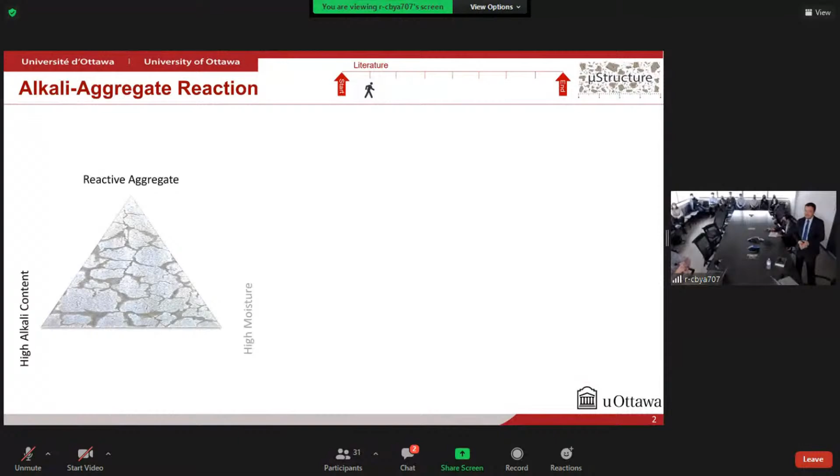So what is AAR? AAR is one of the most harmful distress mechanisms affecting the durability of concrete worldwide. Its development can cause internal cracking, affecting the mechanical properties of the concrete and decreasing its lifespan. AAR can be divided into two main reaction types: alkali carbonate reaction and alkali silica reaction, which is the most common and the one I will be exploring more during this presentation.

For the occurrence of ASR, three elements are simultaneously necessary: the presence of reactive aggregates, high moisture condition, and high alkali content. Without one of these three elements, the development of the reaction is not possible. And once it starts in the field, there's no universal solution that could be applied in different scenarios to mitigate the reaction. So the thing here is that we should act to prevent the reaction from happening.

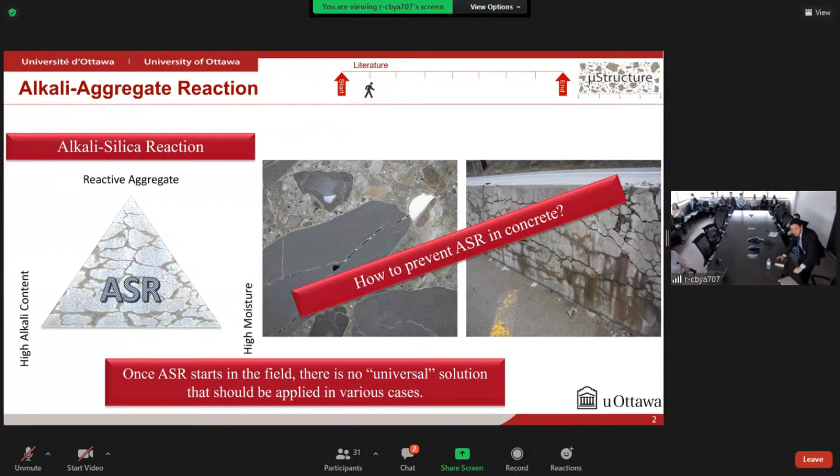So what can we do to prevent the development of ASR in the field? One of the ways is through the use of chemical admixtures, for example lithium nitrate, which can change the dissolution and solubility of reactive silica, forming a protective barrier surrounding the aggregates and changing the chemical composition of the ASR gel. The problem is that these products are too expensive and their effectiveness is constantly questioned in the literature.

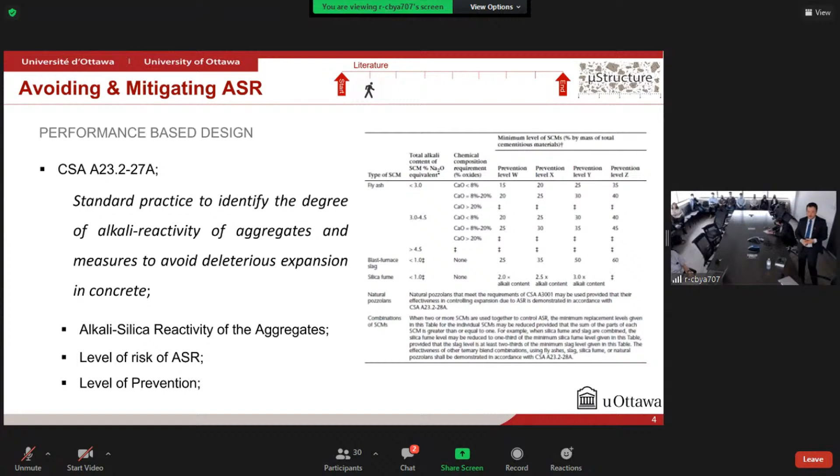Another way is through the use of supplementary cementing materials, which are byproducts from different industries, and these materials can be used in combination with cement to enhance the hardened properties of the concrete. For example, here in Canada we have performance-based design standards that give engineers good practice to identify the degree of alkali reactivity of aggregates and measures to avoid deleterious expansion in concrete. For that, it's necessary to know the reactivity of the aggregates and the level of risk of ASR development. With that information, we can then select the best level of prevention, which is basically this table here that gives us minimum amounts of cement replacement by the most common types of SCMs used in Canada.

However, new evidence in the literature indicates that SCMs only delay the occurrence of ASR in concrete. So we ask ourselves: do SCMs avoid or only delay and mitigate ASR-induced expansion in concrete? And if SCMs only delay the process, is it possible to find other products that would act as a backup to mitigate the ASR development?

Going through the literature with those questions in mind, we found that among the different alternatives, self-healing technology might be the best option, because this type of material can enhance the self-healing of the concrete and change the damage within the concrete.

So what is self-healing of concrete? It can be divided into the natural healing process, which can be caused by calcium carbonate formation and continuous hydration of the unhydrated binder grains. It's important to mention that SCMs can enhance this behavior. Also, it can be caused by cement matrix swelling and sedimentation of solids within the cracks. The overall healing ability of the concrete can be enhanced by the use of artificial healing agents, such as microencapsulated bacteria and crystalline admixtures.

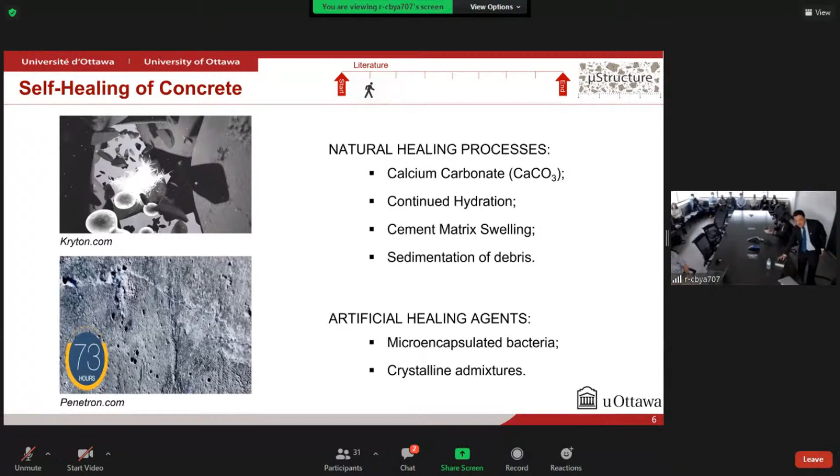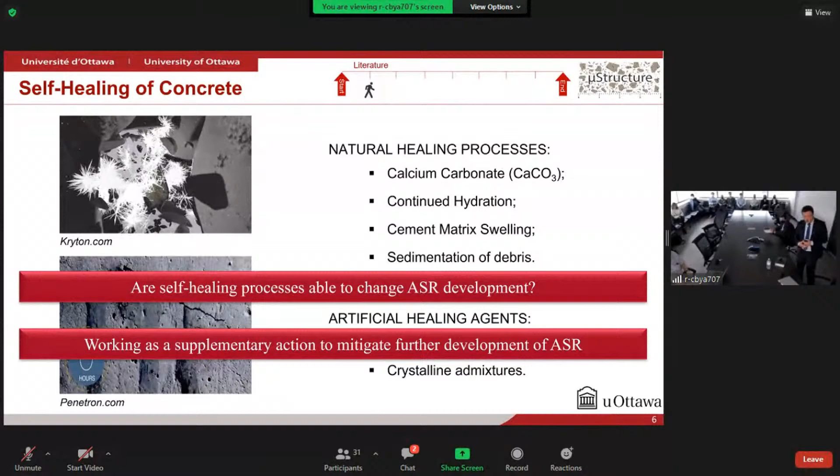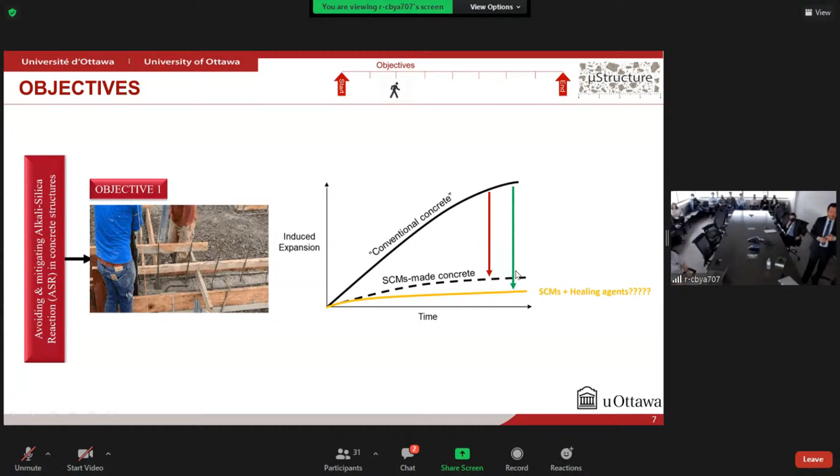So we ask ourselves: are self-healing processes able to change ASR development? And if we use artificial healing processes, can these materials work as a supplementary action to mitigate further development of ASR in concrete? With those questions in mind, we developed the structure of this research, in which first we would like to combine this self-healing technology with SCMs to mitigate the further development of ASR in concrete. However, we would like not only to use these materials for new concrete, but also to use them in aging concrete materials.

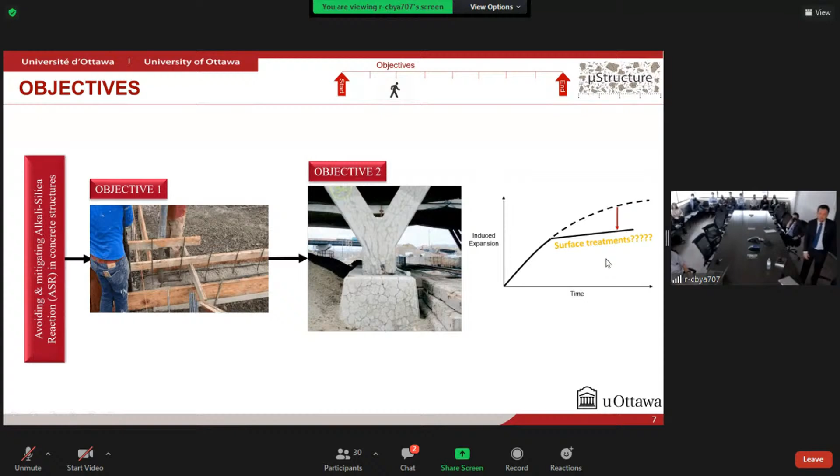For example, if we already have the development of ASR, can we use this technology to further mitigate the reaction? At the end of this research, we would like to propose a framework for an optimized selection of raw materials to prevent ASR in concrete.

In other words, we would like to go from a descriptive selection of raw materials to a performance-based selection of materials. Also, we developed two parallel research lines: first to understand autogenous and autonomous self-healing of concrete, and then the influence of high volume of SCMs on ASR distress development.

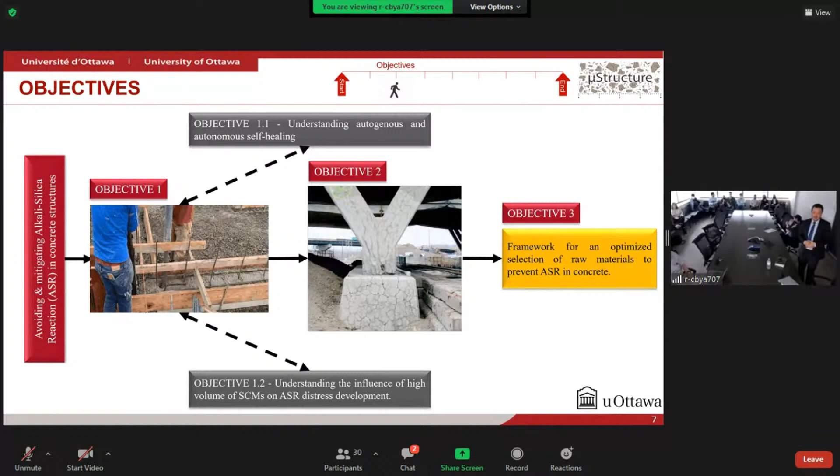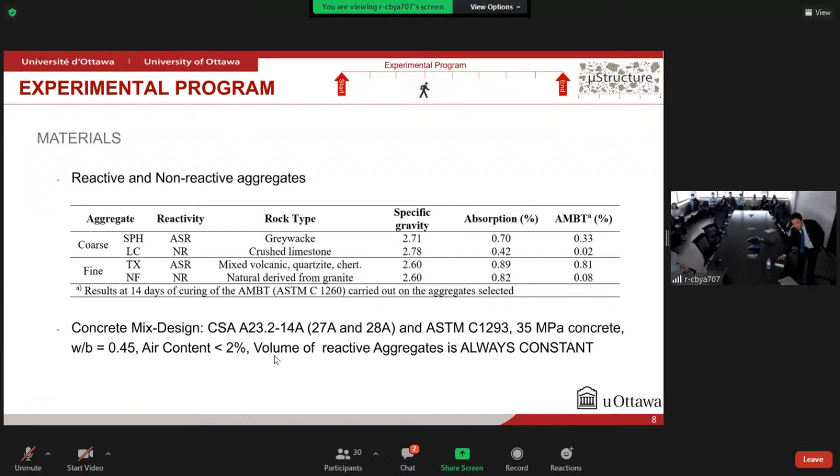We used two different reactive aggregates, a greywacke reactive coarse and a natural fine reactive aggregate. The overall concrete mix designs are based on the most used standards in North America, and it's important to mention that the volume of reactive aggregate is always constant for all mixtures.

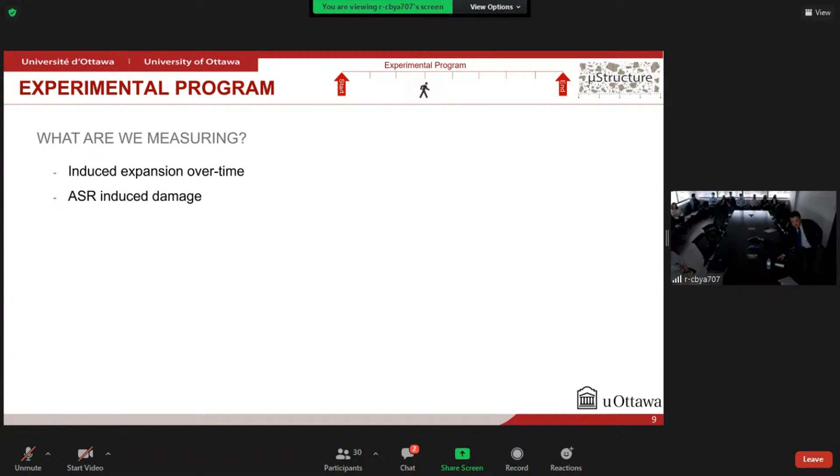So what were we measuring here? First, we measured the induced expansion over time of the concrete specimens, but also the induced damage due to ASR. Damage is defined as the mechanical properties reduction, which we measure through compressive and shear strength.

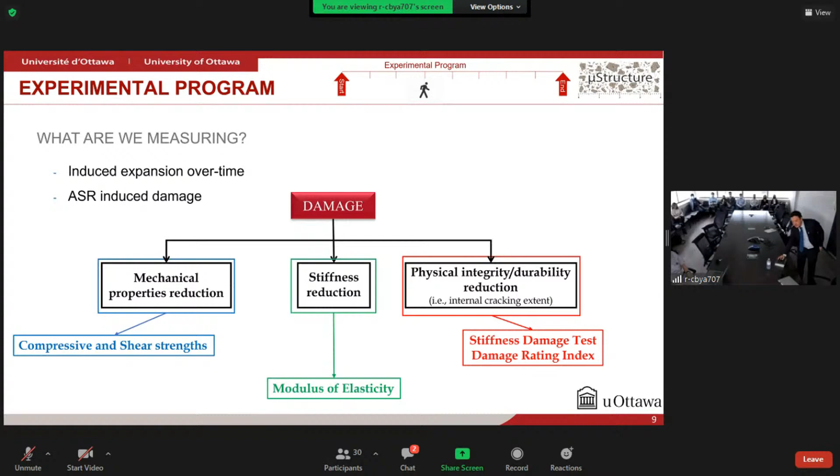Also, the stiffness reduction, which is assessed by the modulus of elasticity, and the physical integrity and durability reductions, with the internal cracking extent of the concrete through the techniques of stiffness damage test and damage rating index, which I will explain next.

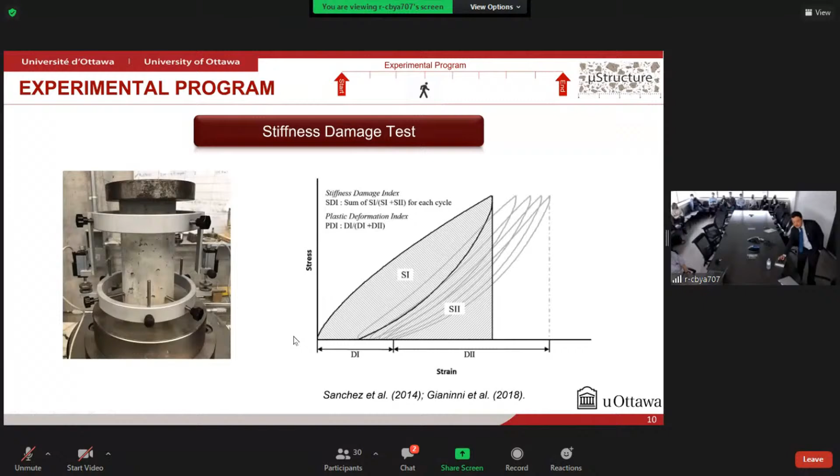SDT is a great tool in which we can quantify the distress degree in concrete. Besides the modulus of elasticity as an outcome, it also gives the stiffness damage index, which is the ratio of the dissipated energy to the total energy applied to the system, and the plastic deformation index, which is the plastic deformation relative to the total deformation implemented into the system.

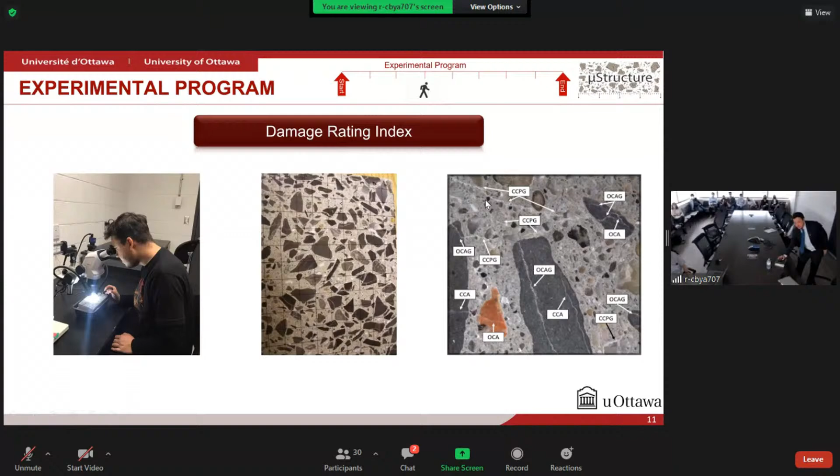As a microscopic evaluation, we use the damage rating index, in which we count the total amount and different types of cracks per centimeter square of a polished surface of concrete. With this technique, we can determine the extent of damage in concrete. For example, different features for cracks each have a weighting factor to give different importance, based on the development of damage in concrete.

So in the first objective of this research, we cast different concrete cylinders with two different reactive aggregates, different binder materials, and different chemical admixtures. The chemical admixtures here are the self-healing agents. After casting, we subjected the specimens to the development of ASR, and over time measured them mechanically and microscopically.

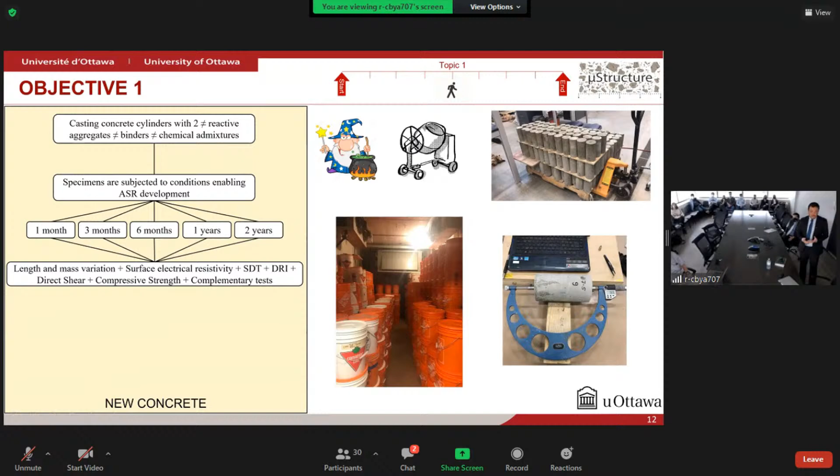So here's a general overview of the concrete mixtures we used. Once again, we followed the mix design based on CSA A23.2-27A. We used 4 different types of SCMs: slag, fly ash, silica fume, and metakaolin, and their amounts are based on the table from CSA.

However, instead of using the higher amount to avoid the development of ASR in concrete between the 2 years of evaluation, we used a little bit less to have a delay in the development of ASR. We are still looking to have some development, because we would like to then combine the different SCMs with crystalline admixtures to see how they would behave together. We used 4 different types of crystalline admixtures.

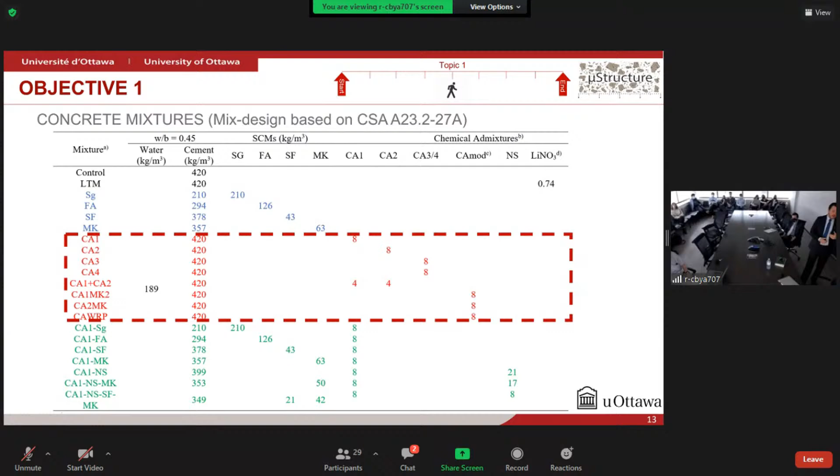We also mixed them differently to try to enhance their healing behavior, and at the end, as I mentioned, we combined crystalline admixtures with SCMs. The results show that all mixtures we produced in the lab were able to first mitigate and change ASR kinetics, decelerating the reaction rate, but also decreasing the final expansion after 2 years of evaluation.

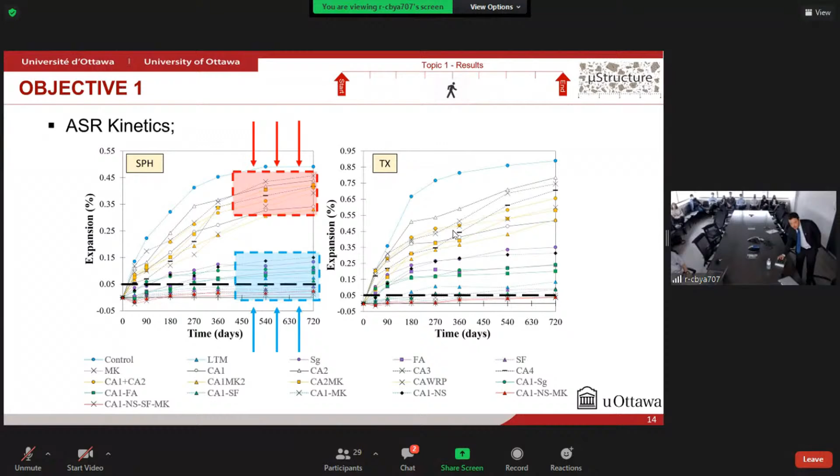As we can see here, for both aggregates, the overall results can be split into 2 main groups. In the first one, at the top, are the concrete specimens where we only added the different crystalline admixtures. In the bottom, we have both SCM-made concrete and SCM-made concrete with crystalline admixtures. All concrete mixtures were able to change ASR kinetics and expansion development.

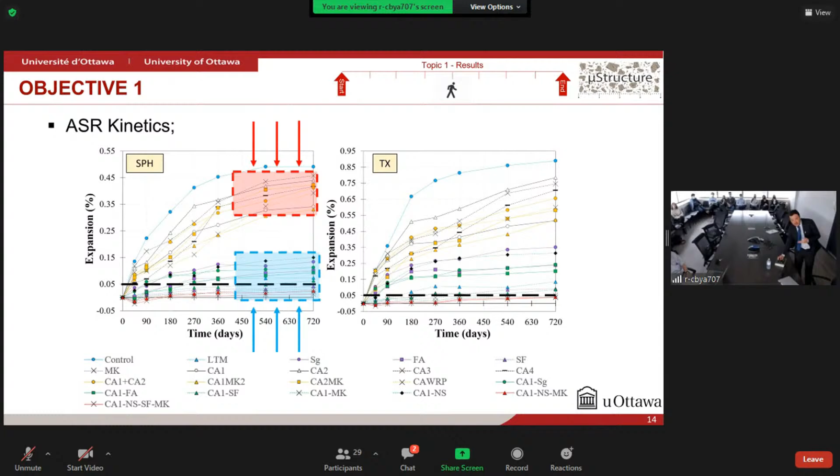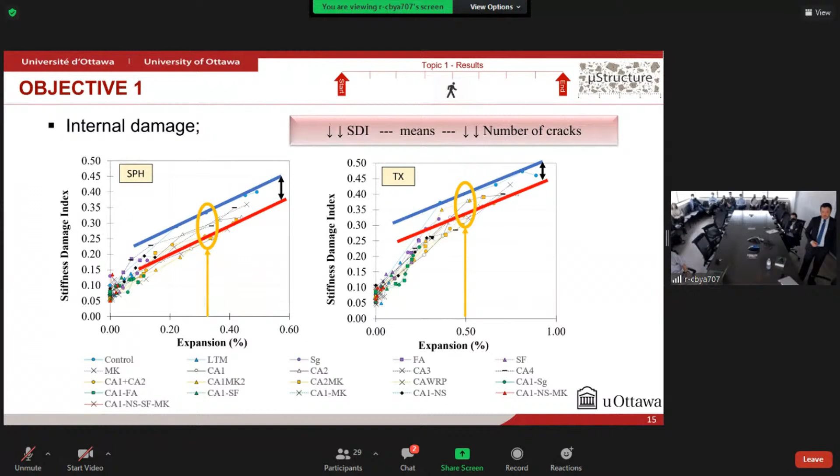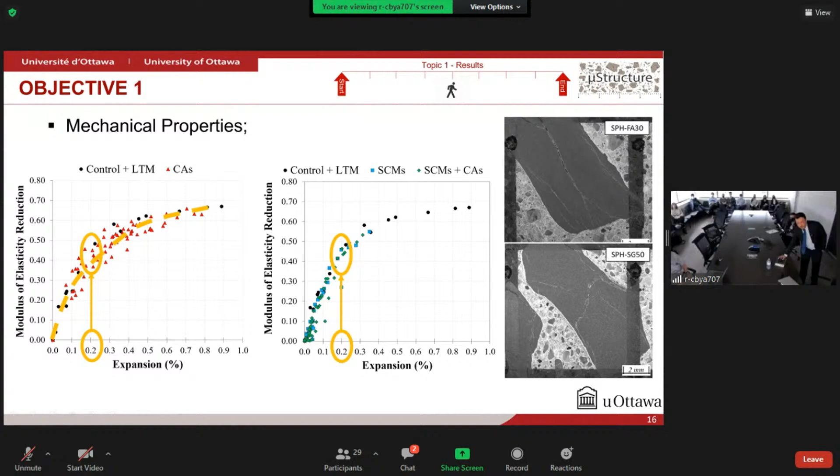This can be proved by the fact that once we count the amount of cracks within the aggregates for the different concrete mixtures, we can also see that for comparable expansion, the amount of cracks is also the same. So why did we have such difference in SDI value, for example?

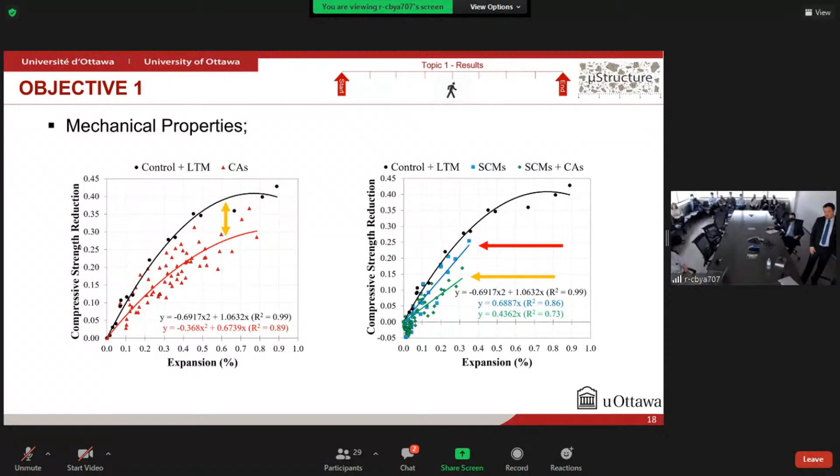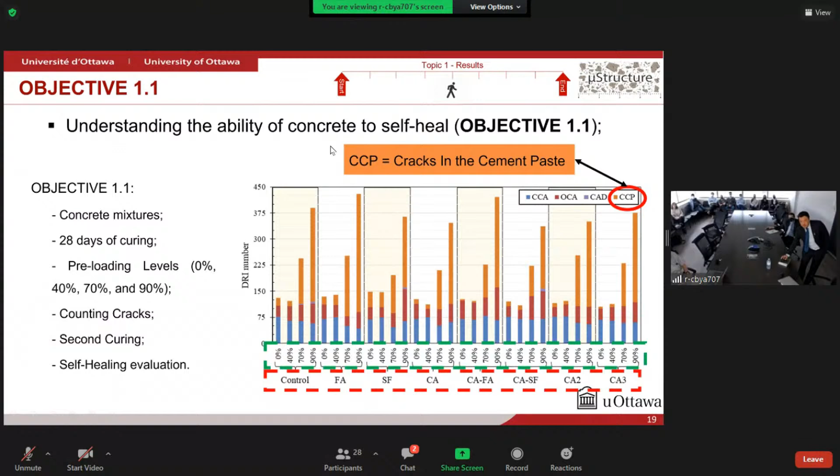It's important to mention that we did not use reactive aggregates for this analysis. After the second 90-day curing, we tested again for DRI to check the ability to self-heal. As we can see, only by adding SCMs to the concrete, we were able to heal 50% of the cracks in the cement paste.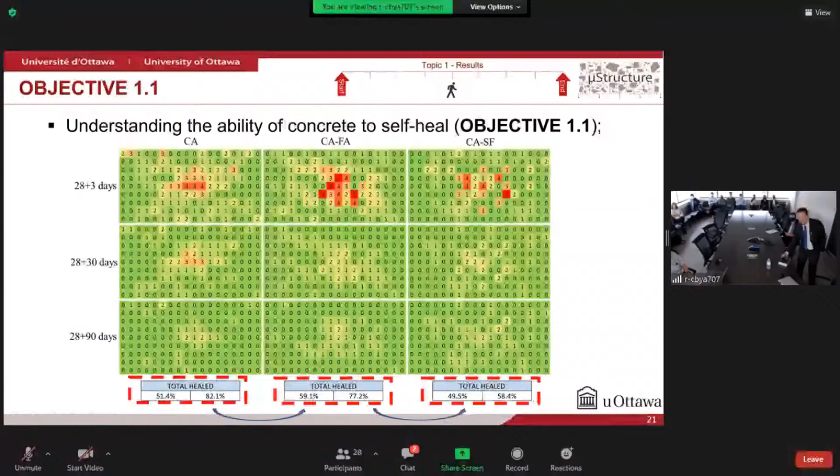So why did we have that? To try to explain this behavior, let's use the second parallel research, in which we evaluate the changes in ASR gel due to the high volume of SCMs. We tested the ASR gel in the cement paste, ITZ, and internally within the aggregate through a microindentation analysis, which gives us the mechanical properties of the ASR gel.

According to the literature, decreasing the amount of calcium in the ASR gel changes the swelling properties of the gel. Now, combining these results with the results on the ability to self-heal of the combination of crystalline admixtures and SCMs, we can explain why we had such a lower value for compressive strength reduction.

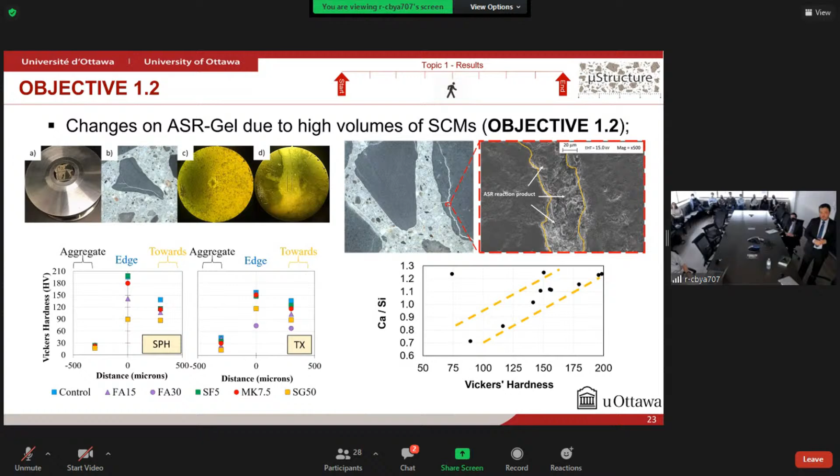In other words, this proves that, first, in enhancing the self-healing of concrete, we were able to change ASR kinetics, but important here is that we were also able to change ASR distress development.

So now that we know that it works for new concrete, can we use this technology as a surface treatment of ASR affected concrete as a feasible solution to mitigate further reaction and ASR induced development in concrete?

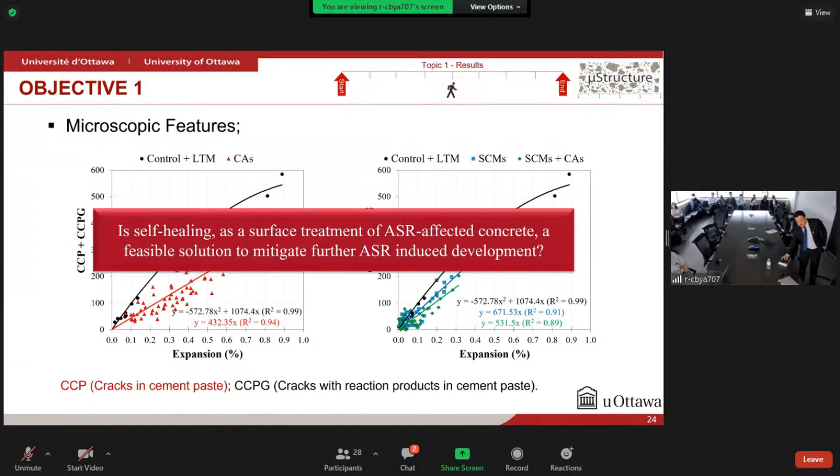For that, we cast different concrete cylinders with the same two reactive aggregates as before, but now only using Portland cement as a binder material.

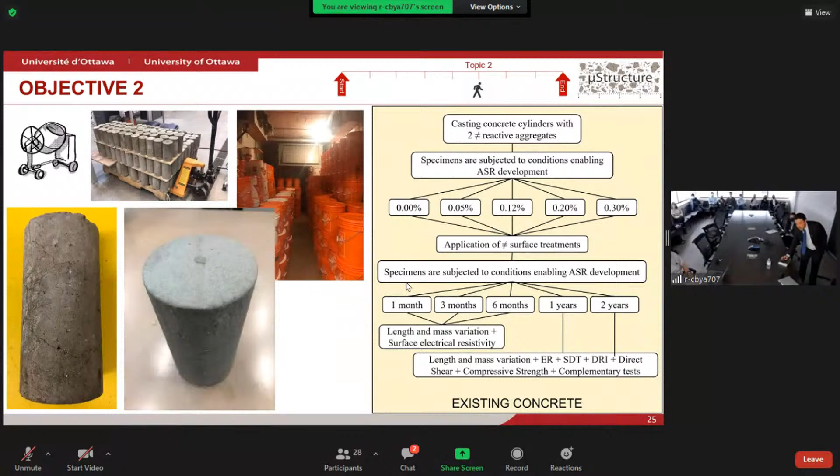We subject the specimens to develop ASR, and once they reach specific expansion amplitudes, we treat the surface differently. After the treatments, we subject the specimens again to ASR development, and over time we evaluate them mechanically and microscopically. Here is a general overview of the different coating materials and surface treatments we apply.

I would like to emphasize that we use crystalline surface waterproofing materials, which is the focus of this research, and we mix this material with different products such as fibers, high performance silanes, cementitious-based materials, lithium nitrate, water repellent, and nanosilica.

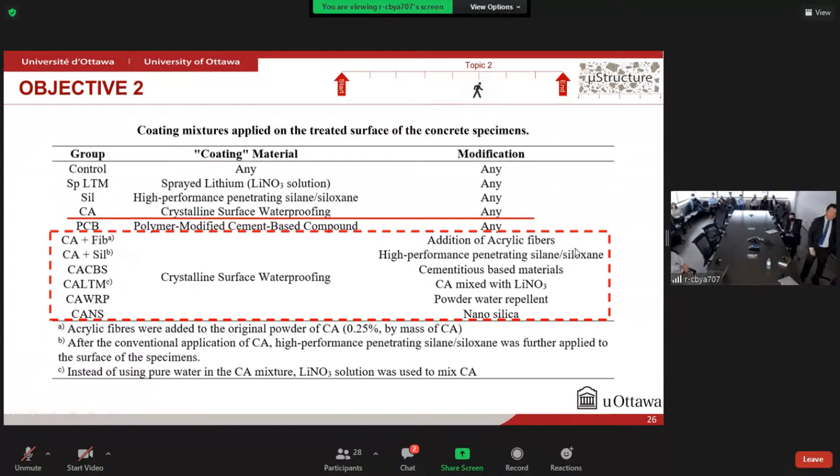The only exception here is the treatment in which we sprayed lithium on the surface of the concrete specimens, which shows similar behavior to the control specimens.

Evaluating the internal damage of the concrete, I would like to highlight again that all mixture surface treatments were able to change ASR expansion development.

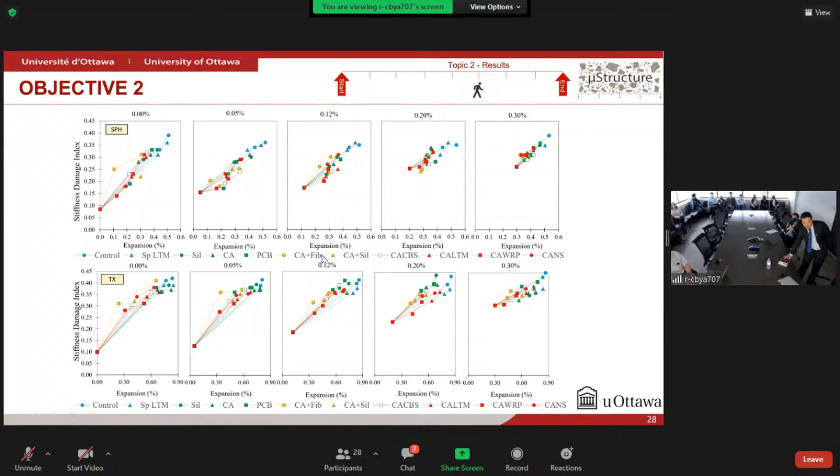At the end of this objective 2, we propose different charts in which we correlate the performance loss of the concrete specimens with the different surface treatments. I would like to emphasize here that the performance loss was calculated as the average of all mechanical properties evaluated in this research.

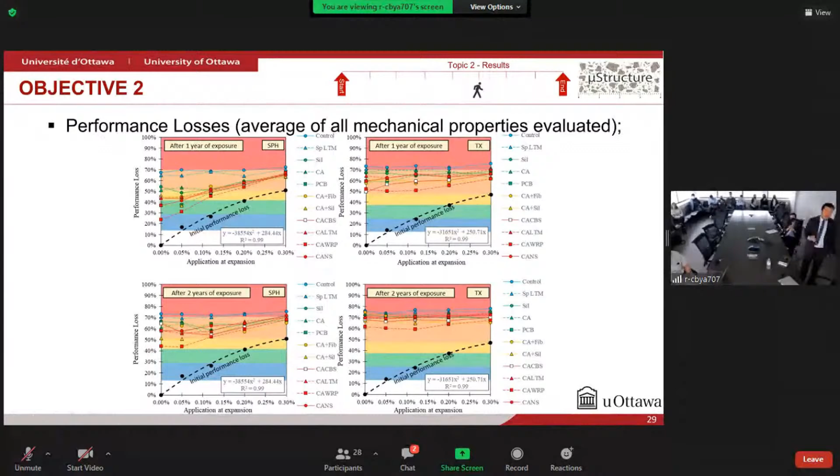So just zooming in here to explain the charts. At the bottom of the charts, we have this black dashed line that represents the initial performance loss of the concrete before the application of the different surface treatments.

Why did I ask you to save that information about the expansion? Because if we see here, applying the different surface treatments at 0.30% of expansion, after 1 year and 2 years of exposure, the overall performance loss between the different treatments is pretty much the same, even comparable with the control specimens. In other words, it indicates that the earlier we apply the different products, the better the results.

Also, these results emphasize the fact that, comparing the results from 1 year to 2 years, the maintenance is important to keep the performance loss of the concrete at lower levels.

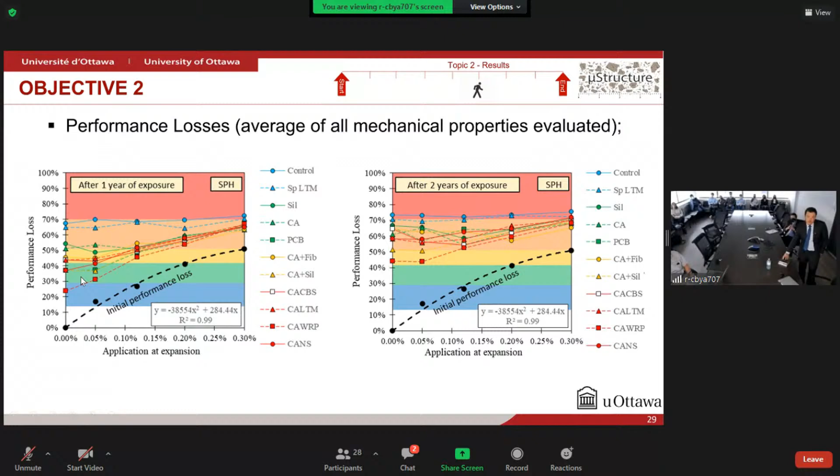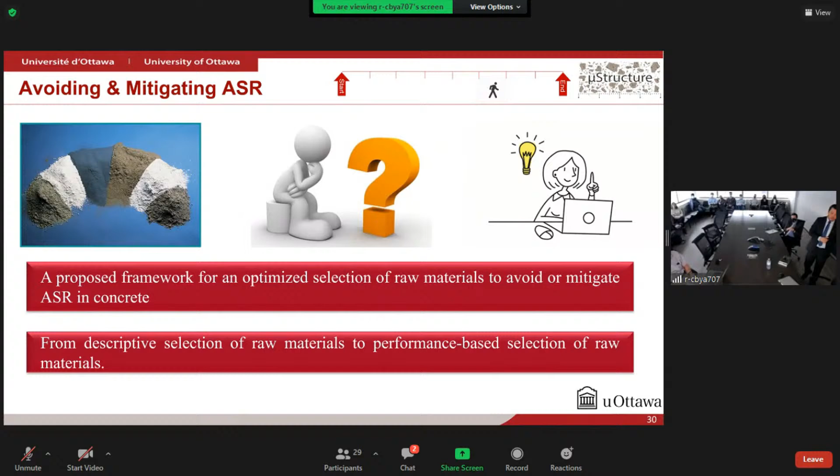We saw that we can change ASR development once we treat the surface of the concrete. However, with these results and also the data from the literature, it's evident that prevention is the best solution. So at the end of this research, we propose a framework for an optimized selection of raw materials to avoid or mitigate ASR in concrete, moving from a descriptive selection of raw materials as in the CSA table to a performance-based selection of raw materials.

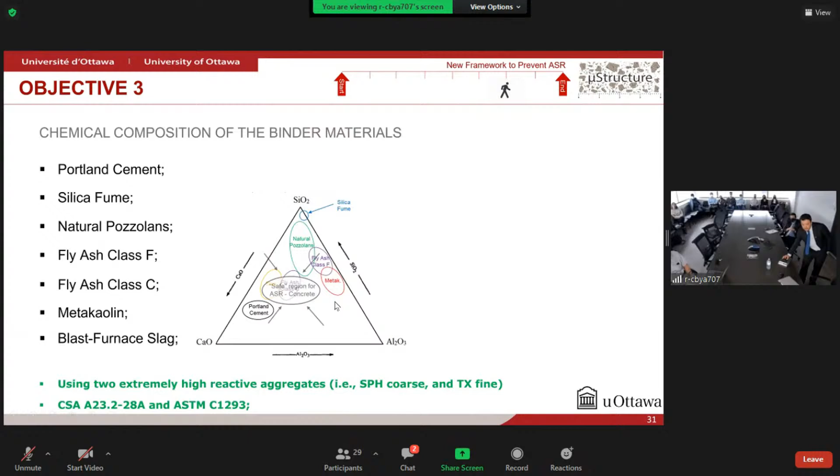For that, we use our analysis, which is based on the ternary plot of the main oxides found in the binder materials. I plot here the chart with the most common types of binder materials located based on their chemical composition. The idea is to show that we are looking to find different combinations of these materials in which we will have a chemical composition that will locate us in a safe region to prevent ASR in concrete.

For that, we went back through the literature and plotted the results in this graph. We can see that following this yellow arrow, we have a trend to better prevent the development of ASR in concrete. With that information, we selected 9 different points in this plot to first try to map the behavior of this path of prevention against ASR, and then to better understand the influence of the main oxides in preventing ASR.

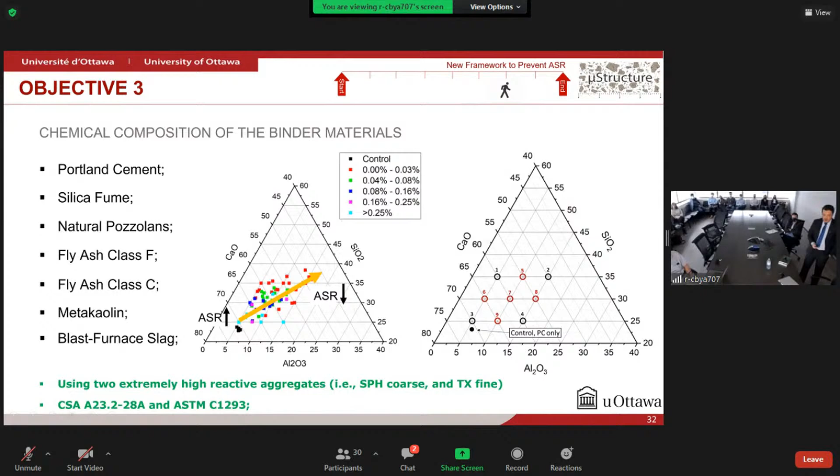Now, fixing the silica amount and following the arrows, we can see that decreasing the calcium amount and increasing the amount of aluminum, we also have a decrease in the final expansion, but not as clear as before when we fixed aluminum. This indicates that the amount of silica in the binder materials seems to be more important to mitigate and prevent the development of ASR.

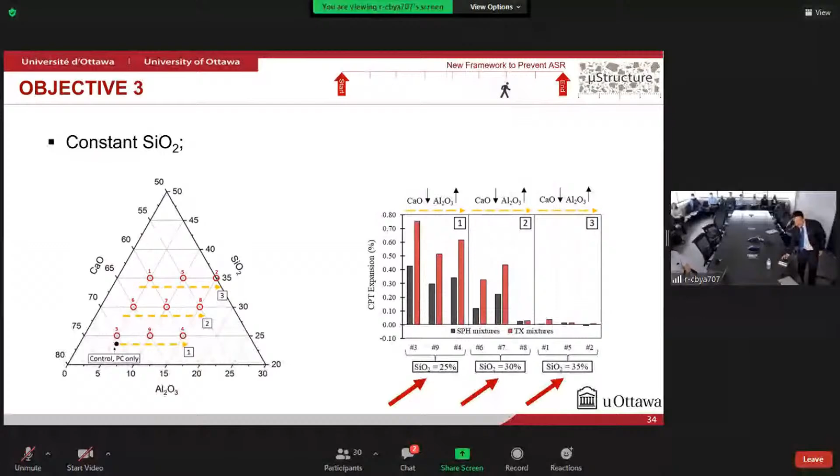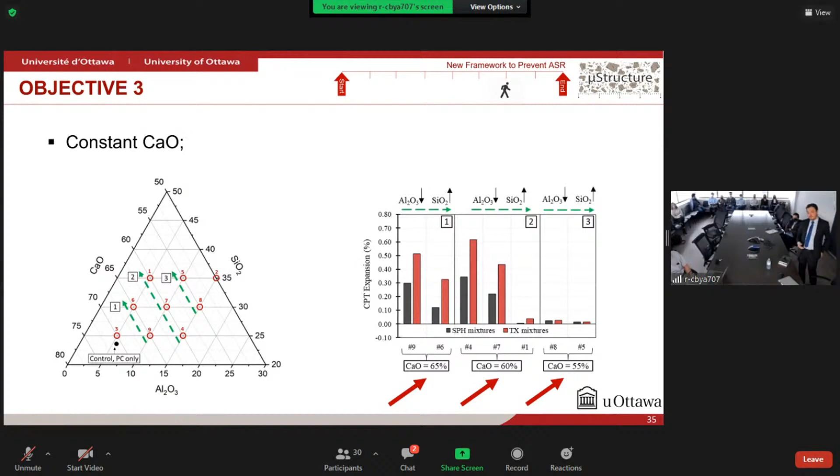Now, evaluating differently again, but fixing the amount of calcium, we can clearly see that decreasing the amount of aluminum and increasing the amount of silica causes a decrease in the final expansion of the concrete, indicating that indeed the amount of silica in the composition of the binder materials is more important to prevent ASR in concrete. To emphasize: decreasing the amount of calcium and increasing both aluminum and silica gives a huge decrease in the final expansion of the concrete.

With these results, and also summing with the results from the literature, we were able to propose a framework to mitigate ASR in concrete, in which we have different regions, each based on the risk of ASR development, as in CSA A23.2-27A. For example, if we have extremely high risk of ASR development, the mixture of binder materials and their chemical composition together should be within this red zone, or above it, to prevent the development of ASR, and so on for the other mixtures and risk levels.

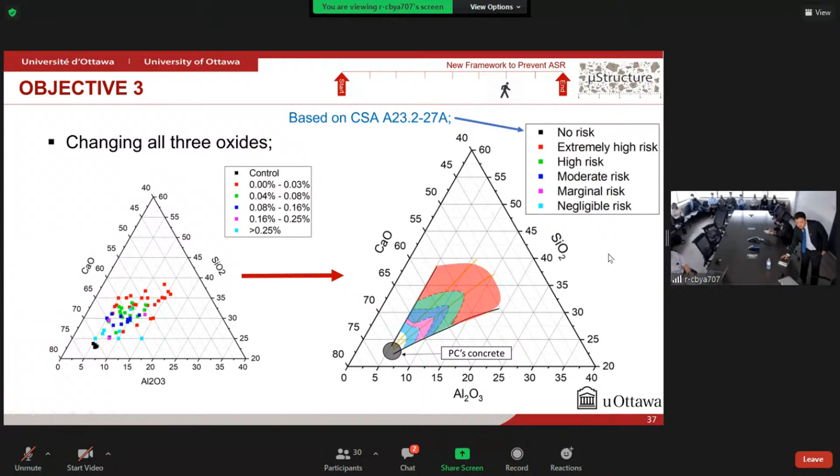In conclusion, increasing the amount of SCMs leads to a decrease in ASR kinetics, also a decrease in distress development for equivalent expansion, and a decrease in the amount of cracks in the cement paste, but the amount of cracks in the aggregates remains the same.

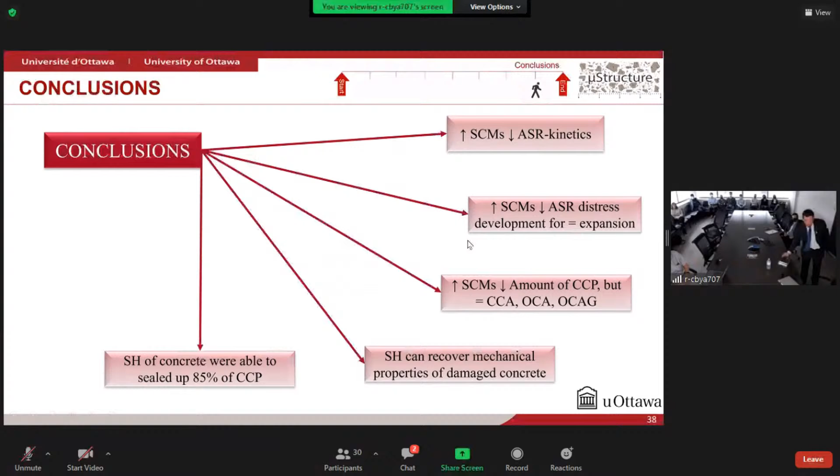This behavior can be explained by the fact that self-healing can recover mechanical properties of damaged concrete, and it was proved that self-healing of concrete was able to heal up to 85% of the cracks in the cement paste. Moreover, this proved that SCMs can indeed change ASR kinetics and distress development. Also, the mixture combining SCMs with crystalline admixtures had the most effective results against ASR development.

And as I asked at the beginning of this presentation, whether self-healing could provide further mitigation of ASR, it was proved that it can indeed provide further mitigation after ASR development, starting in SCM-made concrete. Finally, coatings and sealers were able to modify ASR kinetics. However, once we used the crystalline admixtures as a surface treatment, this material was not able to heal internal cracks in ASR-affected concrete.

In other words, the internal damage just follows closely the expansion amplitudes. And at the end, we were able to propose charts to help in the decision-making of engineers to better select the materials, then the best timing to apply them. Also, the charts highlight the importance of maintenance.

And at the end, we propose a framework to mitigate ASR, to help engineers in decision-making, to better select the different binder materials and their combination, to have a prevention against ASR based on their performance. So thank you, I'll be pleased to answer your questions.

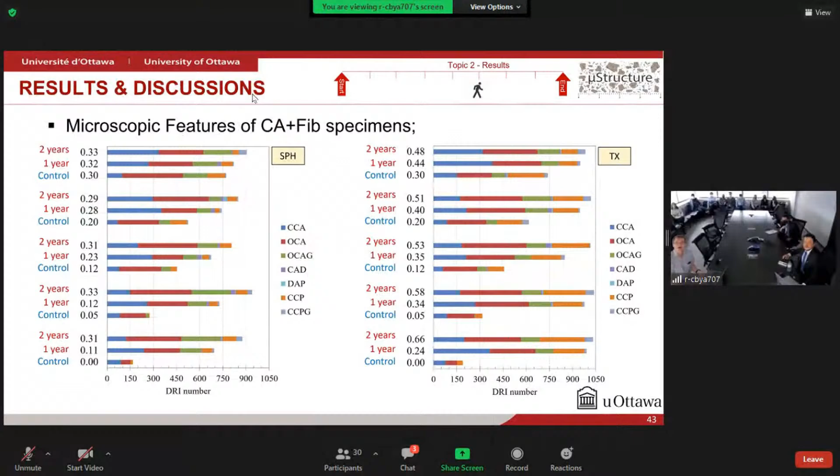Yes. Okay, great, really nice presentation. Quick, this is definitely a difference from the US system. We have typically more about 30 to 45 minutes for a presentation. So it was interesting to hear that sometimes it's even faster at 15 minutes, but I certainly understand that reason to get to the point quickly. Yeah, I thought you did a nice job of pulling this together in the presentation. I have a number of questions for you. And I think from your presentation, a few things that I had question-wise when I was reading through the thesis are a little bit more clear now, so I think that's good.

I guess to start off, just a very basic question on ASR. Can you just distinguish the difference between what makes ACR, or alkali carbonate reaction, different from alkali silica reaction? Yes, overall for alkali carbonate reaction, we should have carbonate rocks in which we have the dedolomitization of the dolomite in these rocks. It has been proved in the literature that the mechanism of damage of these rocks is different. Normally we have cracks going more closely to the surface of the aggregates and then going through the cement paste. Different authors indicate that this reaction is a type of ASR in general, but considering the mechanism of damage of the ACR and this dedolomitization that we have in the dolomite minerals in the rock, I would say that this mainly is the difference between ACR and ASR.

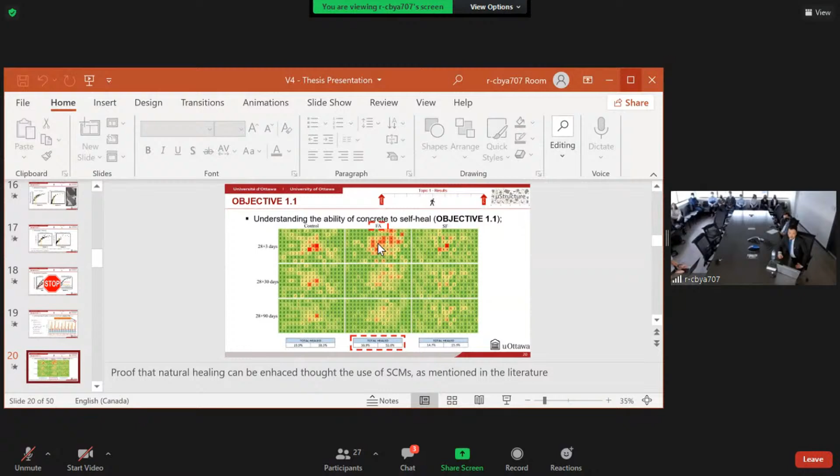So, for example, here we have just using cement. Once we crack the specimens at 28 days and after 90 days of healing, using only Portland cement at a quantity of 420 kg per cubic meter, we can see that cement alone was able to heal 38% of the cracks in the cement paste.

Replacing 30% of the cement with fly ash class F, we were able to enhance this value to 50%. However, using 10% silica fume, this number decreased compared to the control specimen. So the faster reactivity of the silica fume, combined with its lower volume in the mixtures, seems to decrease the ability to self-heal in the concrete.

I think I got it—so what you're saying is the silica fume was consumed faster, up to 28 days, and after that we have fewer unhydrated particles left to contribute to the healing process. Yeah, that makes sense.

My question is, when you ran this test, did you use non-reactive aggregate? Yes, exactly—with reactive aggregate, the ASR consumes alkalinity, consumes alkalis. My question is, will the fly ash, especially if it's low calcium, still react at the low level of alkalinity left after the ASR occurs? So there's a competition here between the fly ash and ASR—if ASR consumes alkalis faster and then you get the crack, you're expecting the fly ash to fill it through hydration products. But once the alkalinity level drops, is there enough alkalis and calcium hydroxide left to sustain the pozzolanic reaction of the fly ash?

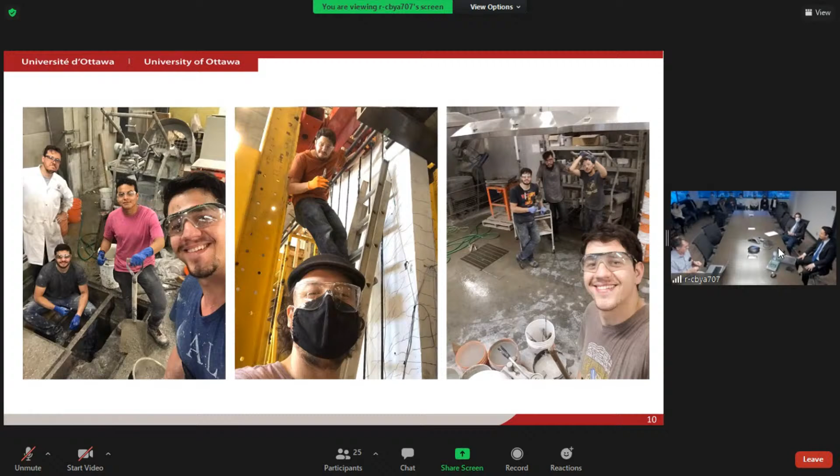And you are my family here in Canada. I know that I left my blood family in Brazil, but here you are my family, and I feel like, yes, I choose this family, and I really feel part of something.

Also, we don't support the same teams, but besides that, it's great to have some games to make fun of each other. It's fun. I would like to thank my wife, because without you, this would be impossible, completely impossible.